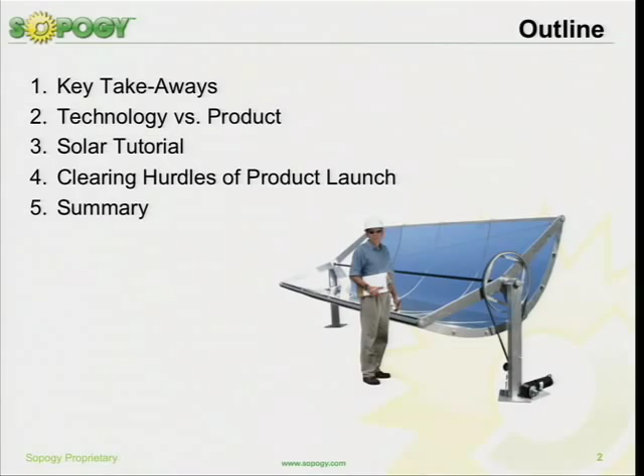just kind of get everybody on the same plane as far as different types of solar technologies. And then what I always like to do is, as a startup for solar, really talk about bridging our product development through HP and all these different types of technology companies in Silicon Valley on how to really get things into the product life cycle. And I think it's important, maybe interesting to the Google audience as well, and then a summary.

All right, so about us. We were incorporated in 2006. This is really quick. We're headquartered in Honolulu, Hawaii, venture-backed. Really originated, a lot of resorts there obviously needed heating, lots of laundry, as you can imagine at hotels and resorts, cooling for Hawaii, and then electricity generation. So they came to the founder, Darren Kimura, at Sopogy and asked him for one solution for all of that. And so that's kind of how it all came out.

And we do electricity generation, cooling, air cooling, heat, process heating, whether it's water treatment, desal, laundry, anything. Can go up to 200 degrees C. And then this last symbol is really a hybrid of any of those systems. So you can do tri-generation from one system. We just launched our SopoNova 4.0 during Intersolar a couple months ago. So that's going well. And simply what we do, we provide total solar solutions for the industrial commercial market.

There was a question before, boy, those collectors seem kind of big to put on a rooftop at home, and that's exactly correct. We actually target industrial applications, and the reasons for that will be obvious after the presentation. So why Hawaii? I guess it's a dumb question. Hawaii is a fun place, but very expensive, right? Because everything has to be shipped in, flown in. So baseload pricing for natural gas is easily 2x that of the mainland and much higher than in other areas. So that's one.

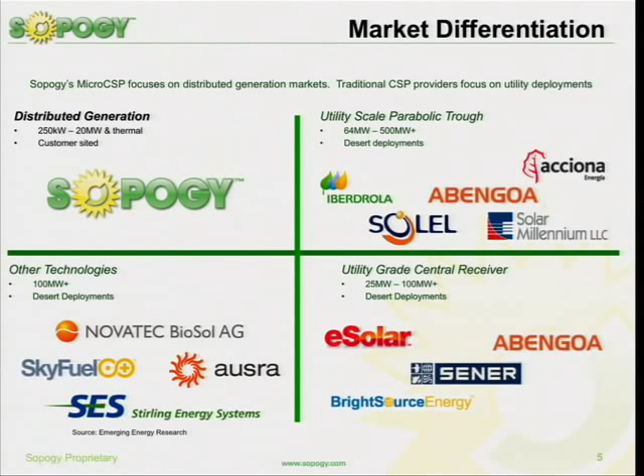preparation, et cetera. So we started targeting smaller, anywhere from several hundred kilowatts to tens of megawatts. And that's on the generation side. And then that exploded to, can you use some of the heat to do process heating and then air conditioning? So kind of finding a niche, but as you'll see, it's a very large market niche.

How does Sopogy work? I'll go over this and then we'll go into more of the technology, but the business works as we really want to be the system provider. Some people want a total solution, which is turnkey energy, but we want to do the technology, supply, be the manufacturer of that, and then work with project financing. Of course, everything needs the financing to work, and then local contractors that we will qualify and certify to do that. That's kind of our model.

So let me back up a little bit on technology versus product. As John pointed out, I've been in Silicon Valley many years, grew up walking through cherry orchards when I was little. And a lot of what technologists in Silicon Valley like is the fact that it's technology. People are enamored with technology. But at the end of the day, it's really the practical implementation of that in a product. And that's the key focus of what our company is trying to do with solar technology.

So back in 1879, Edison didn't really invent the light bulb as everybody thinks. He actually made the first commercially practical one that lasts more than a few minutes or maybe an hour in the lab. So he made it practical. And that was what people used for 100 years, basically. And people still use that in houses. It's about 20% efficient as far as electricity going in and light coming out.

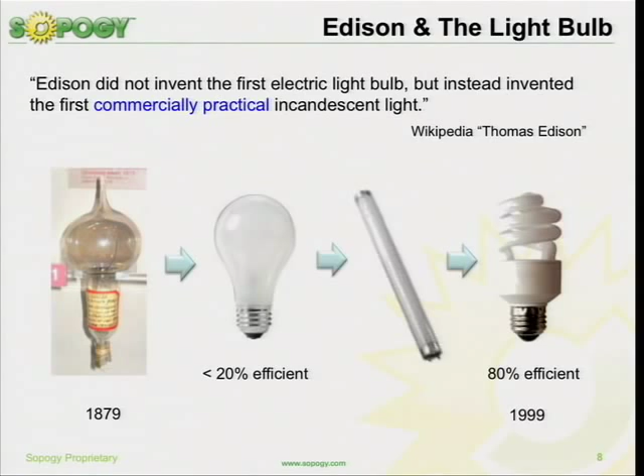And then people went into fluorescent lighting, which is much more efficient, but pretty bulky. Industrial applications, Costco, large garages, et cetera. It wasn't until 100 years later, imagine that, that you actually got to a more efficient light bulb, CFL, and that's slowly moving. So what I'm saying is that moving technology into products that really affect things in a much bigger way takes time.

So commercially practical is really what people are looking for. And everybody can create their own definition: what does it mean to be practical? What does it mean to be commercially available? But really commercially available product development is much more key to solar, or any of the products that we generate in Silicon Valley, than just the technology.

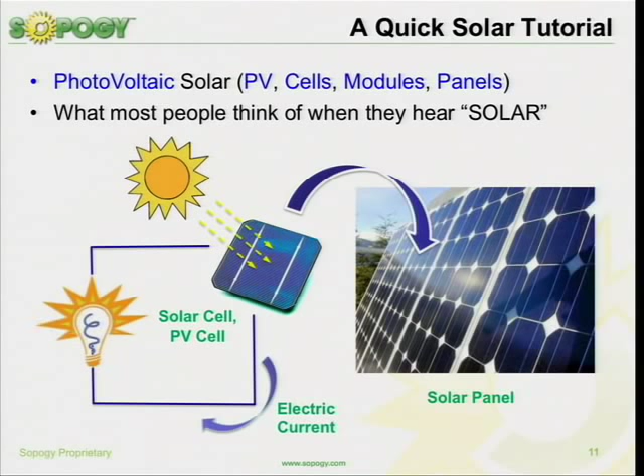So a quick tutorial just to get everybody on the same page. You guys know about solar. You've got lots of solar in your parking lot. Solar starts with what everybody thinks of: a solar cell, solar panel. It starts with a semiconductor, silicon, CIGS, copper indium, or cadmium telluride thin films, all of those you've heard about. It essentially uses the photovoltaic effect and generates a current. The current runs anything DC directly, or through an inverter goes to AC, and also ties into the grid. So that's the photovoltaic effect.

The issue with PV, or solar panel type of things, is it's done in very large clean rooms. When silicon went to 12-inch or 300 millimeter, we thought, wow, how many microprocessors and transistors can you fit on this 12-inch? It was almost like a big pizza pie, and that was a big deal in the semiconductor industry. But with solar, we talk about it in acres, if not square miles.

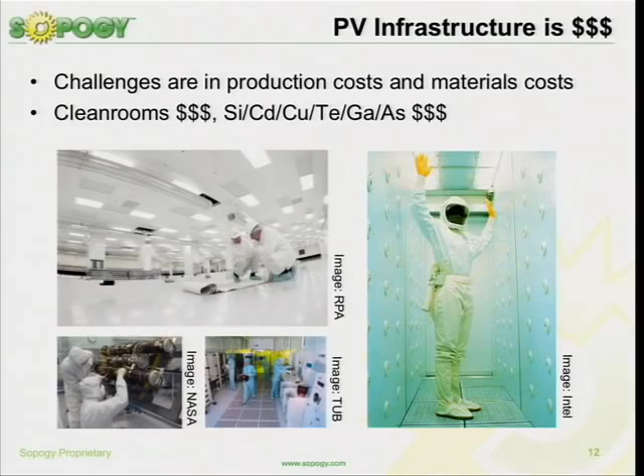And then you begin to realize just the daunting effect of how do we get semiconductor of any kind, spin it on, spray it on, paste it on, just dump it on. It still has to cover square miles to be effective as a real energy solution. And this is really the issue with solar cell photovoltaic PV technology. And I've been in that at HP and then at Emcore for many years.

So why am I looking more at the CSP side, solar thermal? For a lot of these regions, because of the limitations on the size and scope of PV. Since that's so expensive, and I see the solution out there that you have, a lot of people say, well, let's use less silicon. Let's have optics that concentrate, 500 suns, 1,000 suns. I think there's a crazy company in Hollywood that says 2,000 suns.

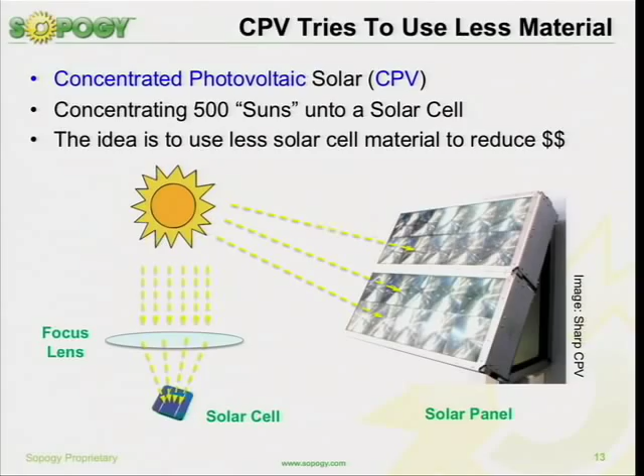But anyways, it's trying to use less silicon, but then you hope that the full-on 2-axis tracking, the optics and everything on top of that is cheaper than actually just using the silicon underneath. And actually, it works throughout, again, commercially practical and all of the aspects of that. So that's CPV, concentrated photovoltaic, again, trying to use less semiconductor for that solution.

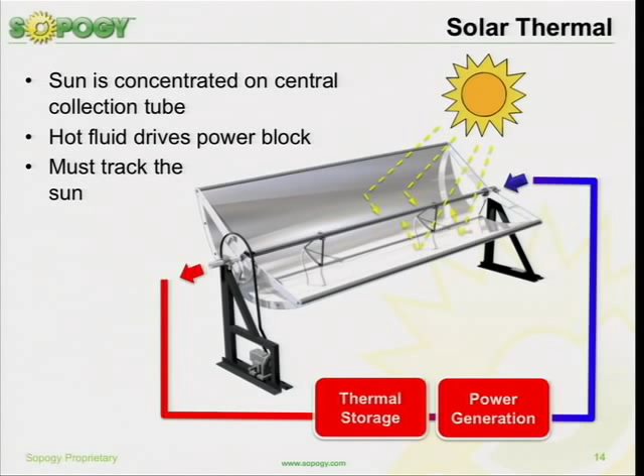So then we get to solar thermal. Around the world, you say solar thermal, everybody, at least in Europe and Asia, thinks about these flat panels that heat water or pools, et cetera. And of course, that's a big industry in itself. But what we do is concentrated solar thermal. It's a little bit more indirect than the photovoltaic effect: it heats up some kind of liquid, generally goes into steam, runs a turbine, and then it goes into electricity. So it's a little bit more displaced from that.

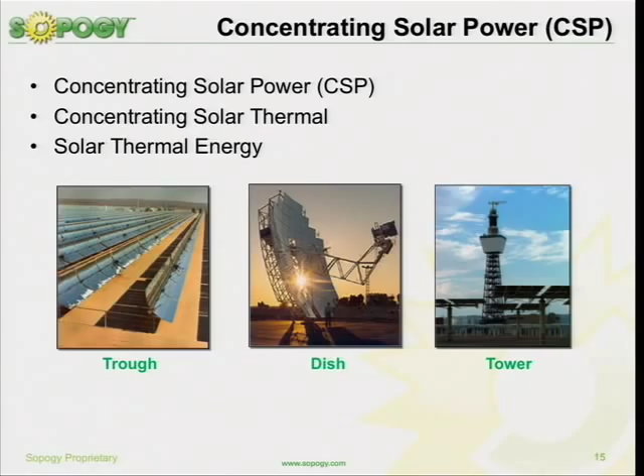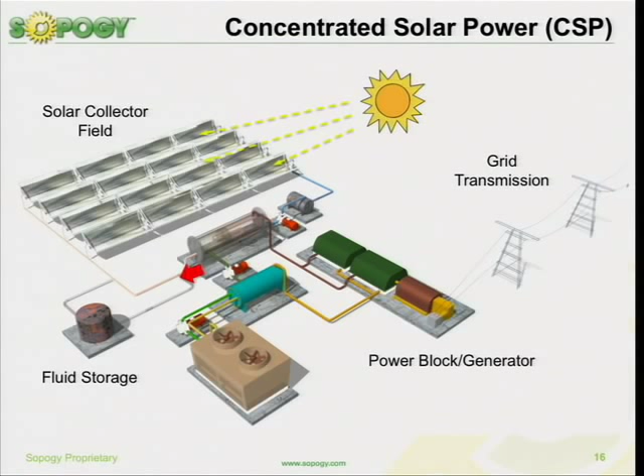Then at the end of the day, you have a source of very large square miles of collectors, again, trying to reduce that cost. It goes into some kind of storage, and I'll talk more about the storage. It goes generally into a power block, generator, and then eventually onto the grid transmission. And these are very large scale. PG&E you read about. Certainly Spain is doing all these. These are in the 100 megawatt types of scale. But that's kind of the basic CSP.

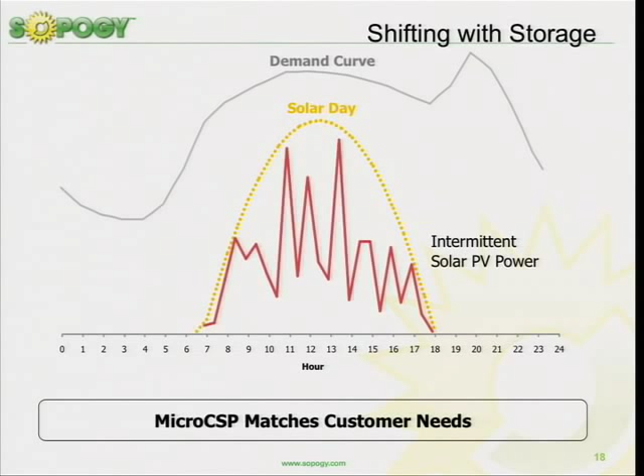So why people are interested in solar thermal is it does give you good, firm energy. The reason is that heat, especially in a large tank, or the amount that you're running through your solar field, doesn't cool instantly, just like turning off the spigot on your bathtub doesn't make it cold instantaneously. So in essence, it has a thermal inertia that guarantees it's relatively firm until you actually turn it off, then slowly it cools down. So you do have some natural storage and inertia, and it gives you nice firm energy.

And then storage is in the form of tanks of water, oil, and some people are talking about molten salt for very high temperature, but relatively reasonable as far as cost and implementation. So let me introduce you to the hurdles.

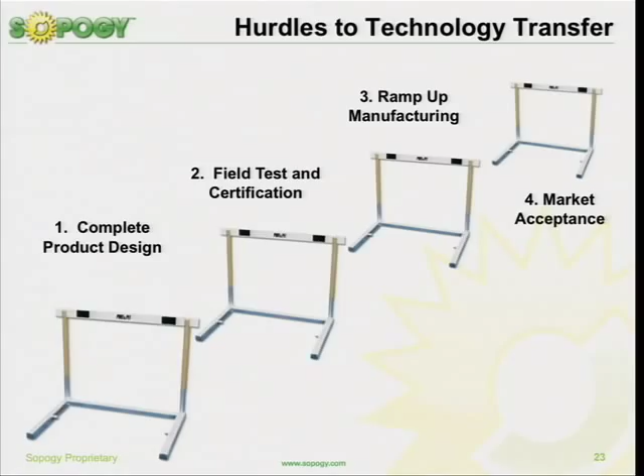So I want to talk both on the micro CSP, but also kind of putting on my technology-to-product hat as far as making something commercially available. What are the hurdles you have to do, right? So I'm assuming that the technology is interesting, it's easy to implement and all of that, and you've completed your product design, which is a big assumption, because typically people who start companies are technologists. They love to tinker. It's never done. If you just give me another month, I'll give you these other features, right? So it's always creeping. But let's say you have a design freeze, beta, and it's done.

Then you have to go into various hurdles that take you finally to market acceptance and product introduction into the field. And even though we've seen a lot of nanosolars and thin films and CPVs, very few of them are really commercially practical. Not just commercially available where, if you're, for example, the Tesla, great, right? You target a very high-end, not necessarily commercially available, but it has to start out at a certain market, and it's just beginning to roll out. So commercially practical is really the key.

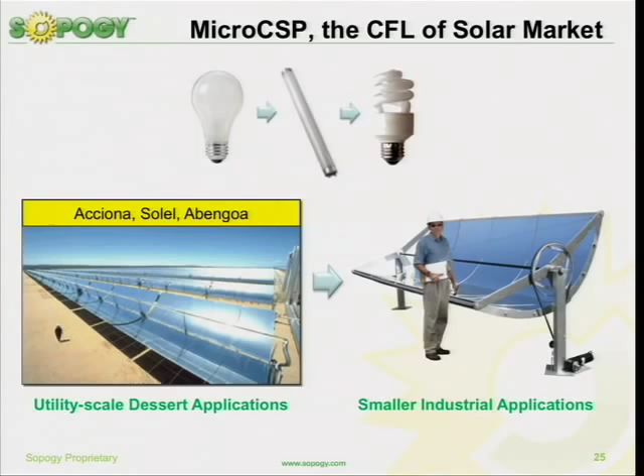And that's what we're seeing with micro CSP. This large CSP, desert type of applications, Solar One, all of those have been proven for decades. They've been running for 10, 20, some 30 years. And in fact, parabolic type of technology has been around since Archimedes tried to, I think, burn ships out on the shore, right? So parabolic troughs, proven, et cetera, but not something that you could drop in like a CFL into an industrial application today. And that's why we went with a micro shrunk-down CSP that has all the benefits and proven capability of CSP, but small enough where you can really use it as a point of source, put it right next to your boiler, which is your current socket, which is gas fired, and then just be a solar source of heat that goes in.

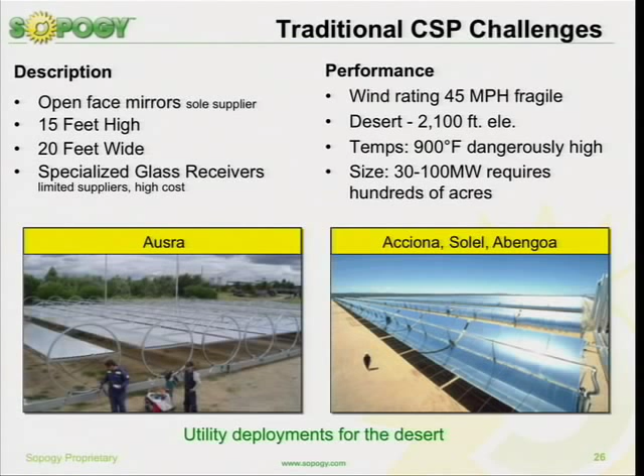And so traditional CSP, what are some of the issues there? You've looked at, obviously, Ausra. A lot of the other startups are in discussion in the news all the time. Very large, most of it with glass. Ausra uses glass. Everyone else uses big glass types of things. Again, 20, 30 feet up in the air. So you're not really talking about anywhere near residential or industrial. You need lots of land, wind loads, et cetera, and just a lot of complexity. Certainly, there's a space and a market for that, but as far as the industrial application, pretty difficult. So we got to more of a Goldilocks effect, which is photovoltaics we thought was too small for what we wanted to do, didn't do process heating, and didn't do air conditioning, which is what we wanted to do for the resorts.

Traditional CSP is too big because you need this land, and it was transmitted away. A lot of the people we were talking about, with industrial needs in India, China, or around the world, don't have very good transmission infrastructure. So that was out of the picture.

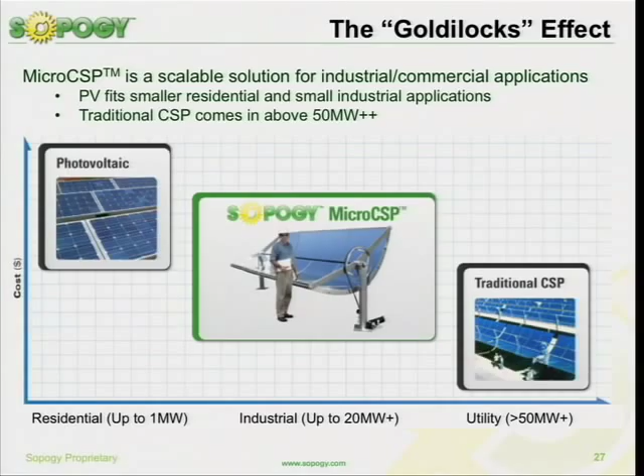And so right in the middle is just right, which is just the right size to be big enough for industrial applications, to be able to do process heating, and then also do solar air conditioning. So it meets this tri-generation requirement and has enough oomph to go into the tens of megawatts for the electricity as well.

Again, three different types of applications here. Efficiency overall, the most economically practical is really taking solar heat and just using it as heat, because that conversion can be extremely high. For a typical flat panel, when you're doing pool heating on a non-windy day, it could be 80, 90%, evacuated tube. So those are very high applications. It doesn't go up to the high temperatures that we need. But again, 60% is really good for solar thermal, getting 200 degrees C that we can use.

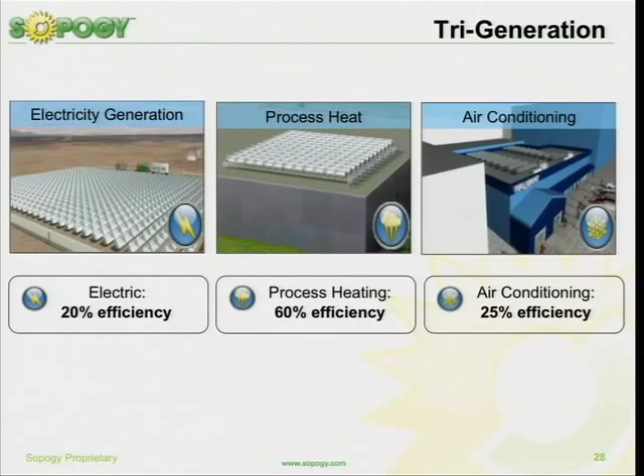Yes, Kevin, question? Efficiency based on land area or reflector? This is efficiency based on energy, solar coming in through the aperture, and then what is the thermal energy going out. So essentially a kilowatt comes in, 0.6 kilowatt of thermal goes out. So on the reflector as opposed to the land itself? The system, correct. So the question was, what is that efficiency? That efficiency is calculated as energy coming in from the sun, energy going out in thermal. And every time you do a conversion, of course, you start losing efficiency, every time you're converting from thermal to steam to turbine, et cetera, and generators.

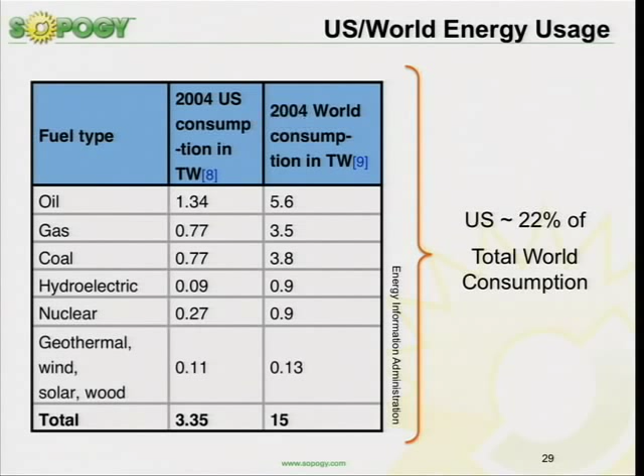All right, so very quickly, I wanted to get back to how people use the energy. This is relatively old data, but oil continues to dominate, gas, coal, obviously, hydroelectric, and then renewable, as you all know, is pretty small. But the interesting thing is, if you look at this chart here, a spread of US energy and the way it's divided up, you'll notice very quickly that residential is about 21%, more than 50% industrial. The rest of it is planes, trains, automobile type of fuel use. So there's a big, big application in the commercial sector. So that's a great market.

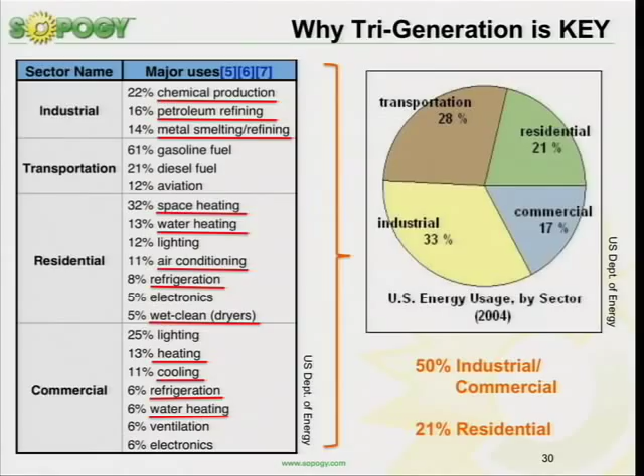Now, if you move to what they need that energy to do, I just underlined the ones that use heating and cooling. When you start looking at electricity, because everybody's enamored with electricity, everybody in Silicon Valley talks about generation and grid tie and feed-in tariffs. Reality is there's a lot more people that need cooling, heating, refrigeration, water treatment, desalination. All of those applications are a huge, huge market. And that's only in the US.

And imagine a lot of the non-industrialized, India, China, Middle East, as far as water treatment, agricultural, the heating and the cooling are huge in those areas. So again, just to point out that that market, which people do not necessarily look at, is a huge need. And displacing that energy really has a bigger impact than just electricity.

Okay, so how do we add value besides shrinking it down? Okay, fine. You took a big CSP, you shrunk it down, it's much smaller, we get that. Well, one thing is we ship it flat. I'll pass this around. This is one of the pieces in the parabolic, it's a rib, that's what we call it. It's kind of a body type part. So it's a rib part that forms the parabolic. It's highly precision stamped, but this is just a standard aluminum stamping. You can go anywhere in the world, and they'll be able to just stamp this out.

So we can go into a region. We are completely fabless. Speaking of silicon and semiconductor PV fabs, we don't have any fabs anywhere at all. We go into a region, we give them the stamps. They take it, they stamp these out, they bend it to form these ribs. And I'll pass that around.

And these ribs just slide onto those aluminum posts, as you're seeing here; they just sit into these little guides. The posts go in. They put the backing on. They turn it over. They put the front, that's an Alanod polished aluminum surface on the top for the reflector. Put it on the stands, and then it's ready to go. So we ship it flat.

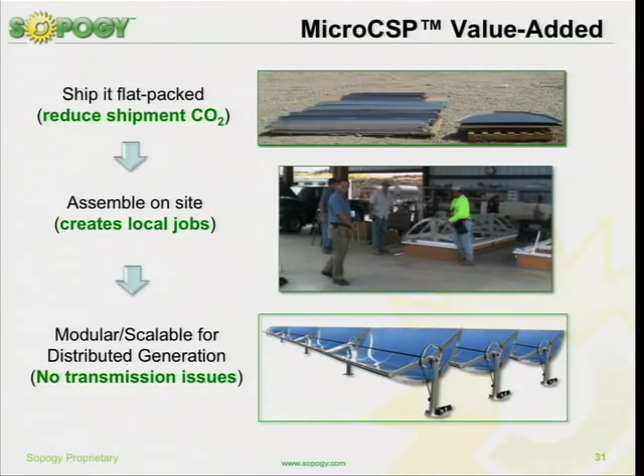Question? So the mirror is thin and it just bends to form the ribs? Yes, the mirror is about 1 millimeter thick of aluminum sheet. It's polished, anodized, and then has a high reflective protection layer on it. And it's cut out in sheets. There's 3 sheets on each one. 3 of these sheets sit onto each collector.

And at the end, and I can show you more after the talk outside, but basically they're just put on, and the 2 cowlings on the ends push the 2 ends of that reflector down onto the ribs to force it to take that parabolic shape. It's really important to take that parabolic shape, because that's where you're getting the concentration when the sun comes in to focus on that 1-inch tube. So there's a collection tube that's 1 inch, 60 inches of overall space as far as the sun collection.

So in the field, you're able to form it with the necessary accuracy? Yeah, it's basically a pretty flimsy aluminum sheet. But as you put it on and you push the cowlings down on it, it begins to form right into that shape. And you'll see it out there.

All right, so no transmission issues. Again, distributed generation, which India loves. A lot of, again, getting back to some of those regions. What we see the future is really a whole new generation of distributed power supply, power plants throughout the US.

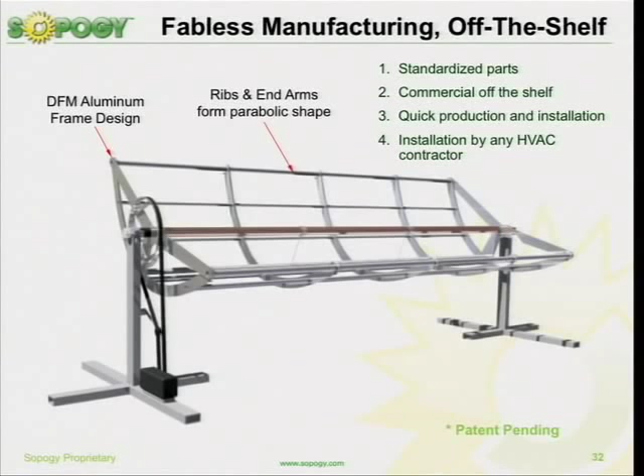So again, speaking of that, all these ribs are inside, turned upside down, obviously, and these very inexpensive aluminum posts just guide it, essentially. And then you put the backing on. The backing is necessary there in case there's inclement weather, hail, etc. It'll stow itself upside down. Let's see, I think I need to click this here.

So basically, it's a single axis tracking, very simple algorithm there. At night, it'll stow upside down. During the day, it tracks the sun. During inclement weather, there's a weather station locally that'll power up and say it's either the temperature, wind, or humidity, or we can web-based control it, and it'll turn it upside down to protect it.

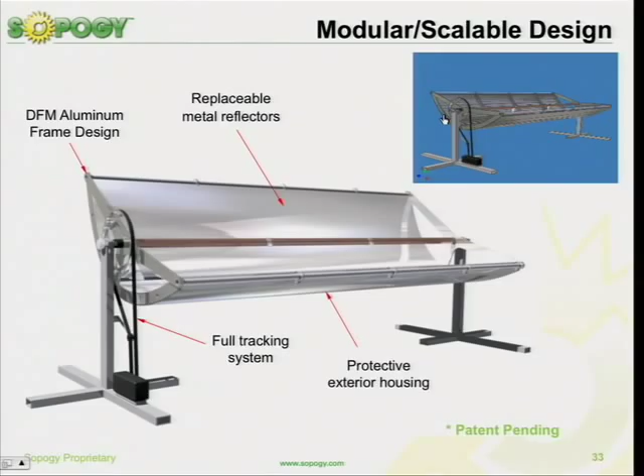In the evening, it stows upside down so that there's no dew or collection of dust, et cetera, that goes on. The other is, in some of our fields, we'll have just an automatic sprinkler underneath so that if it does need to be cleaned periodically, it can be automatically sprayed while it's in the stow position. Again, trying to keep the operation and maintenance costs down and just essentially be automated.

So with this type of, again, getting back to the gentleman's question early on, rooftop mounting, et cetera, we had to do a lot of analysis, a lot of wind tunnel testing, et cetera. It's really like an airplane wing. People look at it and they go, wow, this is an airplane wing. So it does have a lot of structural analysis that's needed. Again, deformation obviously is the worst case, how much can it handle before the aluminum starts buckling.

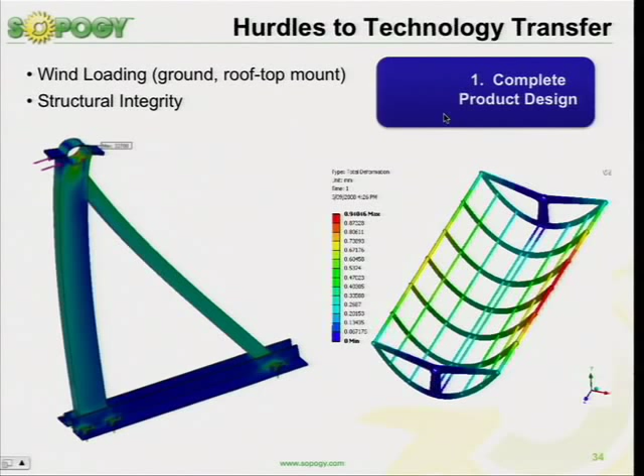The other is, as you have certain wind loads on it, how much structural pull, either downward force or upward force, needs to be calculated so that when they build it into a rooftop, they know exactly. It only weighs about 200, 250 pounds because it's aluminum, quite light. But with the wind, as it starts pulling, it can be much higher than that. So a lot of the analysis has to be done in order to be okay.

Another of the hurdles, obviously, is field testing. And we're just beginning to do that. We just launched the product. We have multiple rows. Again, it's Sopo Nova. Whenever you hear a startup that has Sopo Nova 4.0, that means they've been busy for the last few years doing 1.0, 2.0, and 3.0.

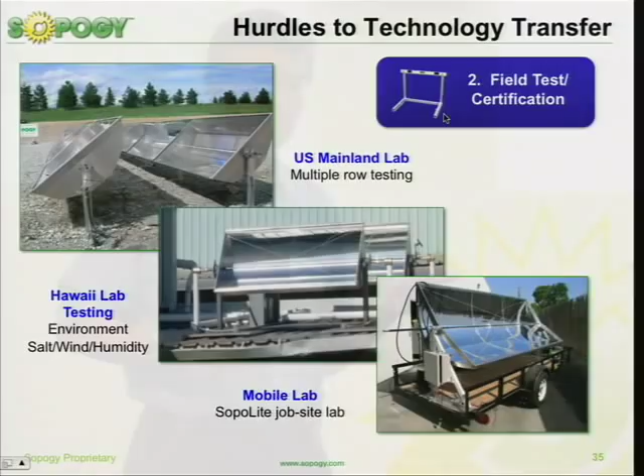And we were just honest enough to admit that this isn't the very first collector we made, even though it's the first product commercially available. So we've done various versions in the field testing. Hawaii has very salty air, good storms that come through that really test the product.

We had to go through, just like Edison did, a lot of different films that just don't work very well. I mean, aluminum loves to corrode. It oxidizes very easily, and Alanod, we found, is the company in Germany that specially makes it. So a lot of research just to find something that doesn't corrode after 20 years, or again, if it does, we can pull it off. But hopefully we don't have to do a lot of that.

So rooftop labs. And then we found the mobile labs and obviously regional demonstrations to be really key. Anytime you're doing a new technology, whether it's based on old CSP, but new enough where people really have to see it. And so all of these are available, and we try to bring it to different sites to do that.

Okay, so just recently, if you actually live in the area, we just gave a free one. Eichler, it's an old swim and tennis over in Palo Alto. We just gave them a free one. You can go back there and take a look at it. It's just a small 8-foot collection for their heating needs there. But again, trying to make it available, demonstratable, and field tested, so it's actually practically available.

The other in this area, as you guys get to know and work in the energy field, lots of different certifications. Obviously, you heard of UL for safety. TUV is something that is mainly a lot of European-based. And then CE certification, obviously. And these take a long time. And in fact, when you're doing something as new as we do, CE and TUV, well, TUV doesn't even have a certification for us. So we're part of their committee to write a certification for CSP.

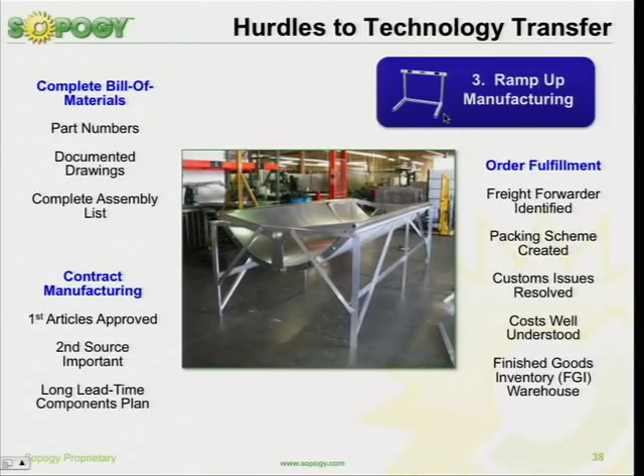So all of these things, I won't bore you with it, but again, ramping up manufacturing is more than just building one. The technologists love to build one, they move on to the next thing. Building thousands of these, shipping them across the ocean to Dubai in the desert, and then working through customs and getting all of that. There's just a lot of aspects of that.

And then obviously the market acceptance side, a lot of it is evangelizing, and we give a lot of talks. But because of our outsourced nature, we're fabless, so we don't have any manufacturing, and we really don't have any crew, if you will, that goes out and installs. So we'll certify, and we have what we call parachute teams that'll go in throughout the world and help train the local EPCs, engineering, procurement, and construction type of companies to do that.

So the key takeaways with micro CSP is it enables a new generation of scalable distributed generation. Again, we want it to be scalable, modular, distributed generation. It's a total solution, and we're trying to target that pretty large space of industrial, commercial that we talked about, electricity, heating, and cooling.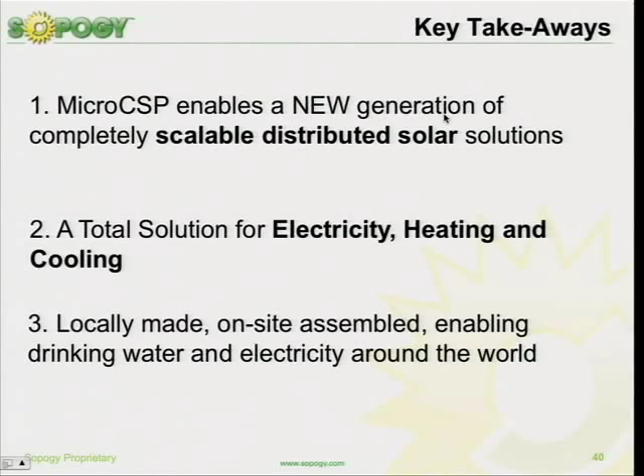And then one thing that I really liked about the technology when I came in from more of the PV world is it can be fabless, locally made almost anywhere because it's just sheet metal, on-site assembled, and then drinking water, water treatment, all of those things. It enables a lot of very interesting things that we generally don't think about when we're looking at just energy generation, which is kind of the focus of people.